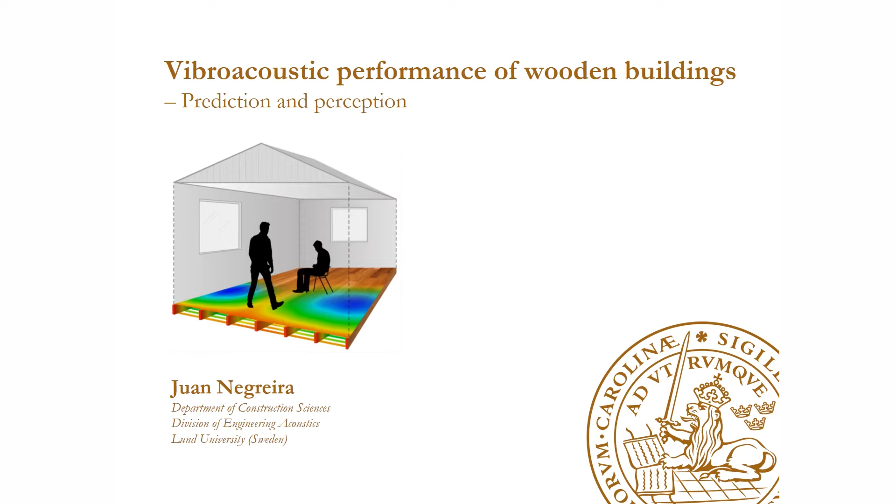I'm going to try to present it in a very descriptive and non-technical way. If someone has a question afterwards, I'm willing to happily go into the details.

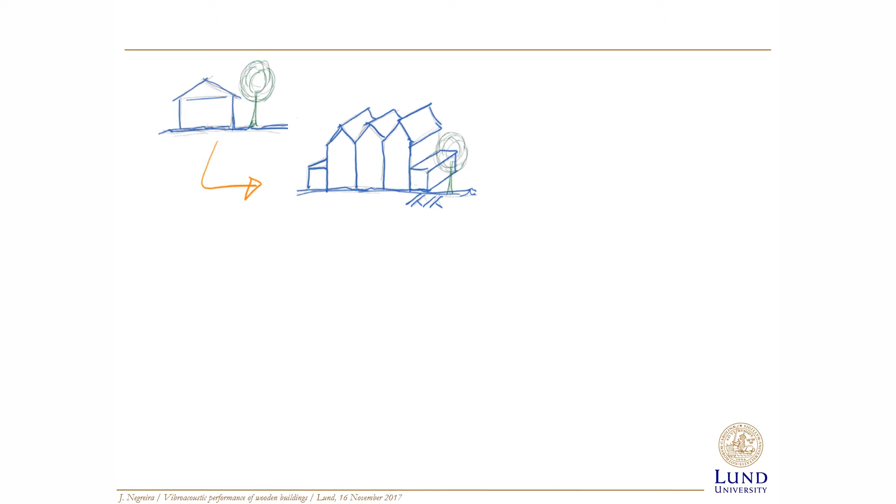This is a house which could be made of any material. This is how people used to live many years ago, isolated from each other, growing their own products, going out in the morning to hunt, coming back in the evening. But as society evolved, people started to gather together and create populations. That became even more important, even more patent, after the industrial revolution. Then cities started growing and people started living all together, building vertically, close to each other, as cities densified.

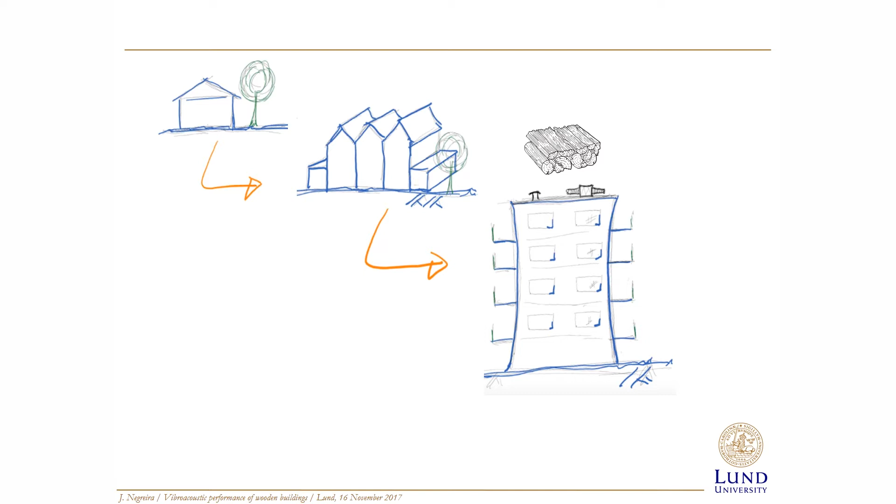Nowadays, especially in Sweden, those high-rise buildings—because Sweden is the third largest country in the European Union and 70% of it is forest—many of these buildings, and growing, are made of wood. The problem is that even though they comply with present acoustics regulations, as Nikos talked about before, people still complain.

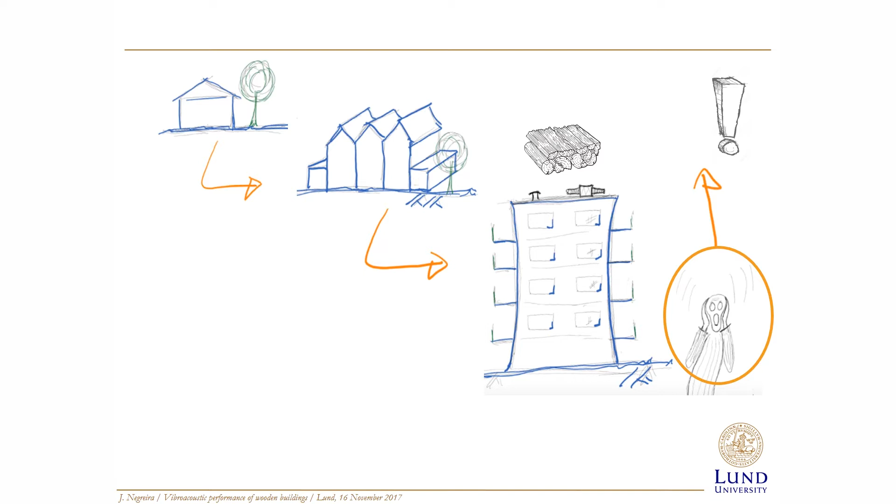They say, yeah, they may pass the regulations, but I'm not happy here. So one first objective of my thesis was to try to understand why people complain. So the first aim was to try to find design indicators of how humans perceive vibrations.

I focused quite much on the low frequency range. The other point of my dissertation was—you have to believe me on that—there is a big difference whether in one building we use one type of floor or another type of floor. Whereas this is quite easy to predict in heavy structures like concrete.

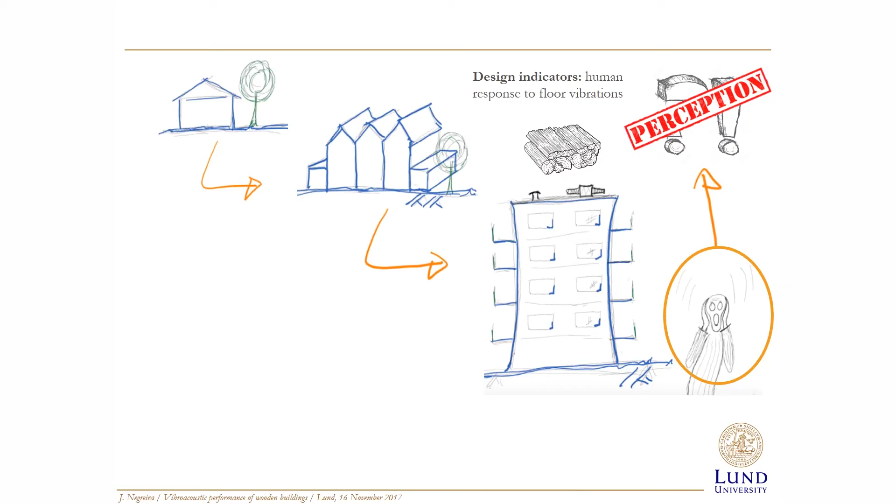Wood is a natural material. It's very unpredictable. It depends quite much on whether you have knots, resin pockets, and stuff like that. So due to that variability, it's quite hard to predict the behavior of a wooden structure.

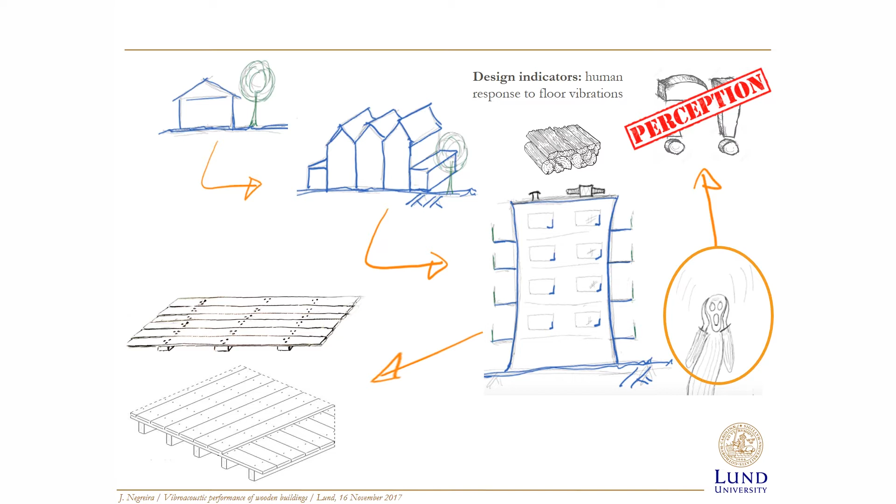So the second aim of the thesis was to try to create and develop computer models to predict the vibroacoustic behavior of these buildings during the design phase. If that could ultimately be achieved to some extent, there would be cost savings for the industry, and ultimately vibroacoustic comfort could be achieved by the inhabitants.

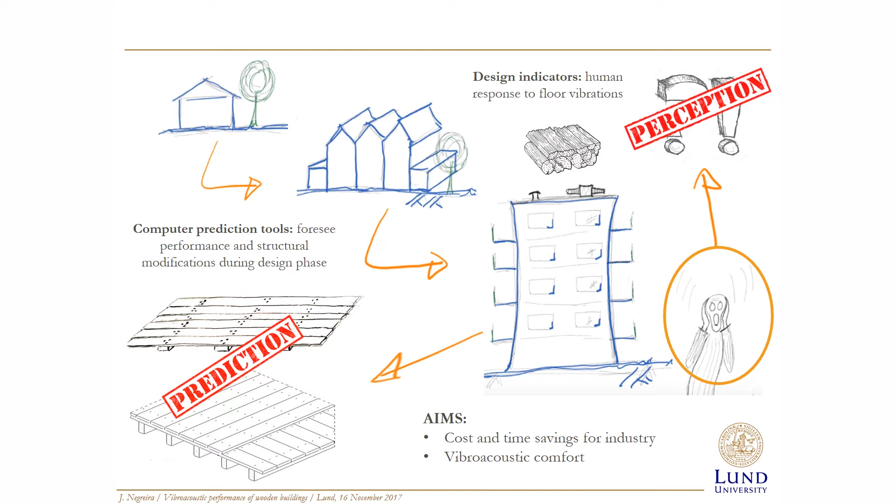So this is everything which was driven at during the 5 year PhD. I will just go a bit deeper into the details. The title was Vibroacoustic Performance of Wooden Buildings, Prediction and Perception.

Wooden multi-story buildings in Sweden were allowed during many years, but due to numerous urban fires during the 1800s, they were prohibited, and that century-old ban was lifted in 1994. All of a sudden, those buildings started gaining popularity and increased market share, just because wood is very cheap and very abundant in Sweden.

It allows a high degree of prefabrication. That means you can build indoors in a factory, transport it to the building site, and just put it up like a puzzle to make a building, which is very important in a country with bad weather like Sweden. It's also environmentally friendly, so it has a lot of advantages.

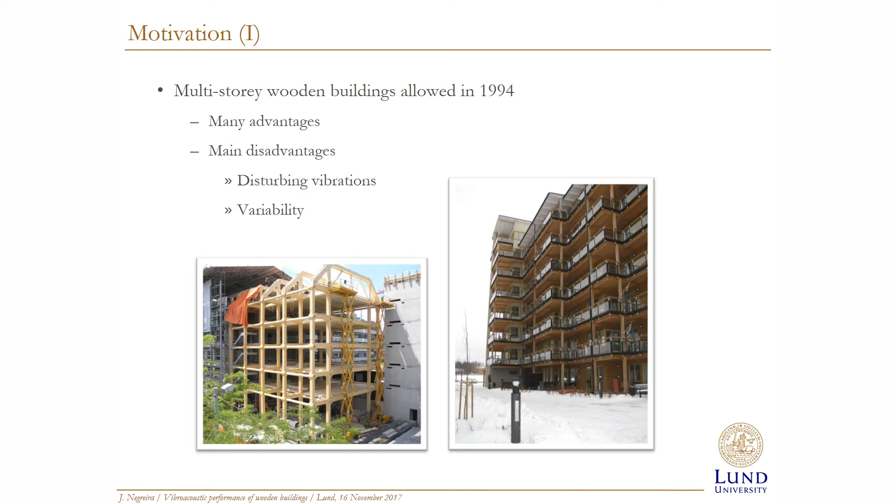But as I said, we have two big problems in our field, the field that I'm dealing with: the variability, and due to that, the acoustic comfort.

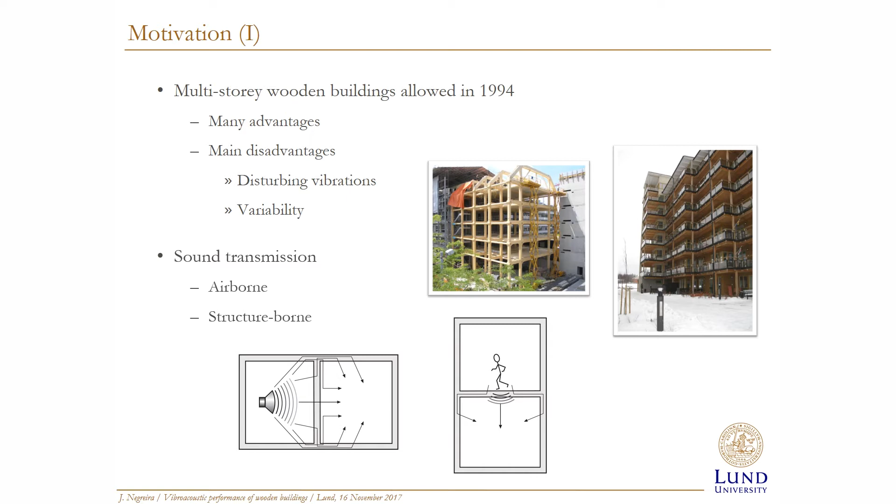We can distinguish in any building, but now focused on wooden buildings, two types of sound transmission. One is called airborne sound, where most of the sound energy is transmitted through air—I speak, it goes and my voice hits a wall and radiates to the other room. That is airborne sound. The other is impact sound transmission, which is the sound we hear down here when someone above us strikes directly on the floor. It can be people walking, objects dropping, any source you want.

Nowadays, the current ISO standards—and now I'm going to focus on impact sound because it's the one which has more importance, or is more critical, in wooden buildings—the current ISO standards in Sweden... and Sweden is the only country in the world which accounts for frequencies below 100 Hertz.

The only country in the world that counts frequencies from 50 hertz to 3,150 hertz in impact.

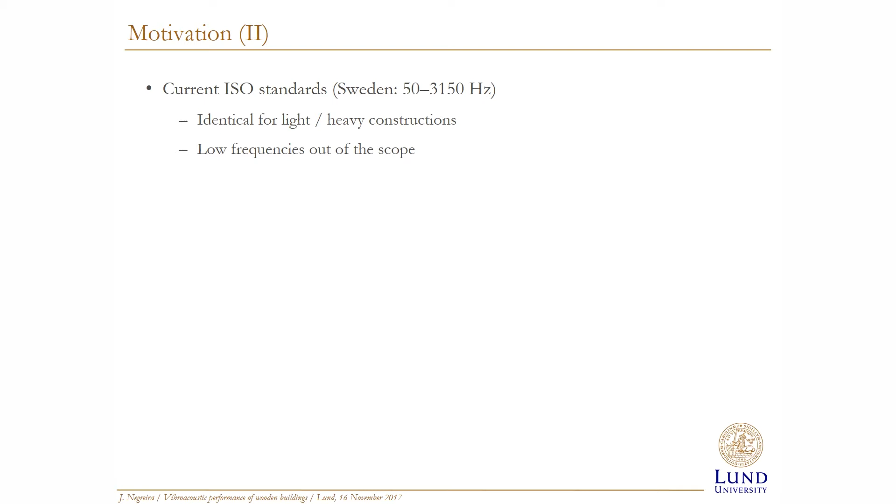The problem with those ISO standards is that they are identical for concrete heavy buildings and lightweight buildings. When they were developed, they were just made for concrete buildings, because wooden buildings were prohibited. So when wooden buildings were reintroduced, they said we'll just use the same norms.

The problem is that low frequencies are out of the scope, frequencies below 50 hertz. That means they're not accounted for, and that could trigger some types of problems.

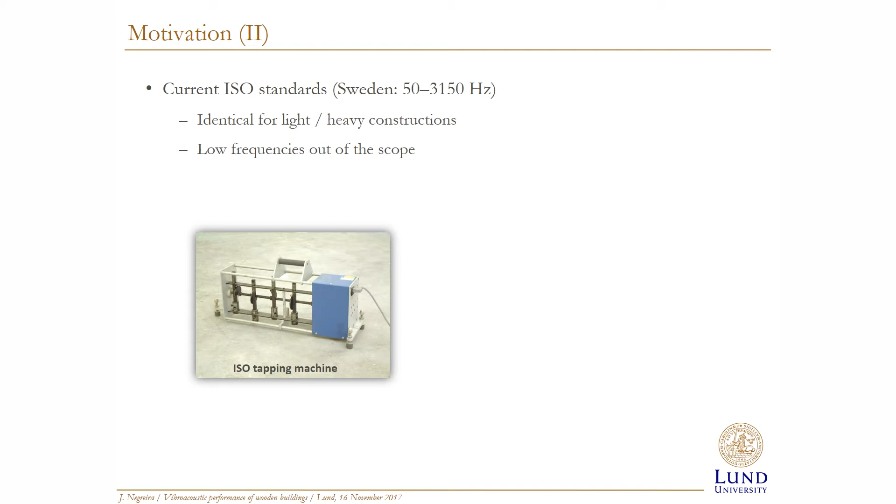As a matter of fact, there's an excitation source called the tapping machine, which is like 5 hammers that alternatively hit the floor, and then you measure the sound down in the room below. So using this source, you can assess how good your floors are against impact.

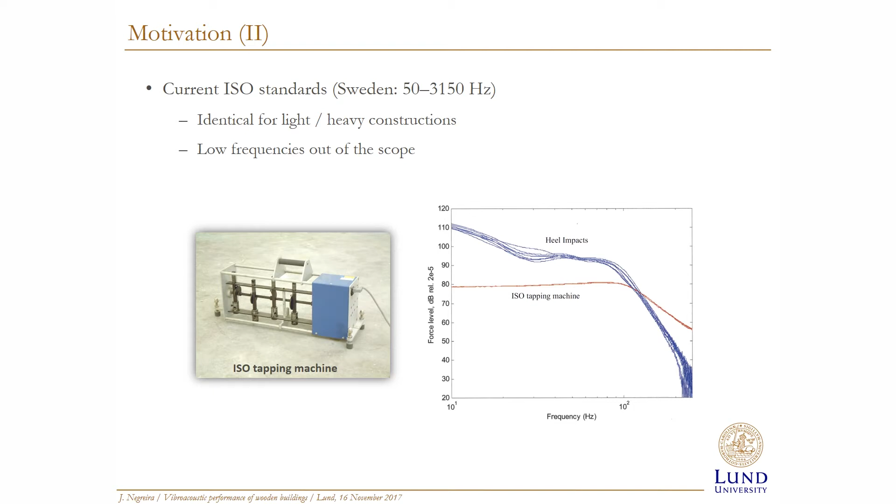If you compare the force that these tapping machines create against daily activities, this is a plot from a Norwegian researcher called Anders Homb. You can see that the force from the tapping machine very much underestimates heel impacts, which are daily activities that happen in wooden buildings, meaning that at frequencies below 100 hertz, daily activities are actually much higher than what you could evaluate or predict with this tapping machine.

Based on that plot and other things, there was this Swedish research project I was involved in called AkuLite, where we measured impact sound from 50 hertz to 3,150 hertz in wooden buildings, and then asked people via questionnaires how they felt about living conditions and stuff like that.

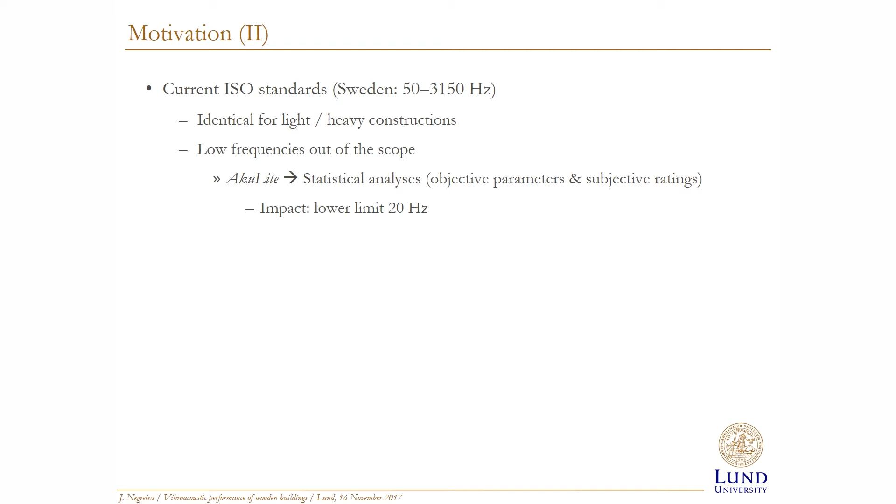If we compare those standardized impact sound indicators, which go above 50 hertz, with people's responses to questionnaires, the correlation was around 52%, the R-square correlation statistically. Whereas if you include frequencies down to 20 hertz, the correlation skyrocketed up to 83 or something.

That points out that in wooden buildings, since they are very light and easy to put into movement, low frequencies are of importance.

Then another question is, how do you address those frequencies below 50 hertz? Are those vibrations? Are those sound that you can measure with a microphone? That's another question.

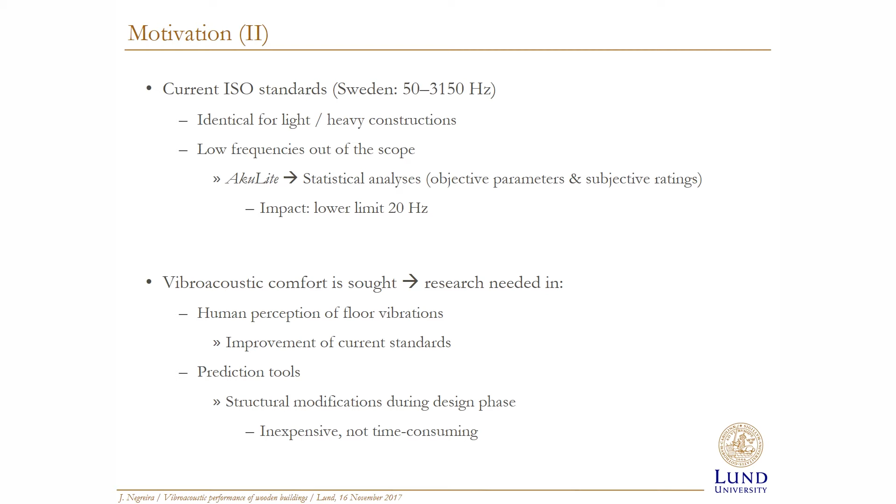The whole point was that if vibroacoustic comfort is to be achieved in these types of buildings, focusing very much on the low frequency range, we have to dig more into human perception of vibrations, and also try to improve the correlation with the standards, and develop prediction tools so you can predict the behavior of a building before it's actually erected, saving time and money for the industry.

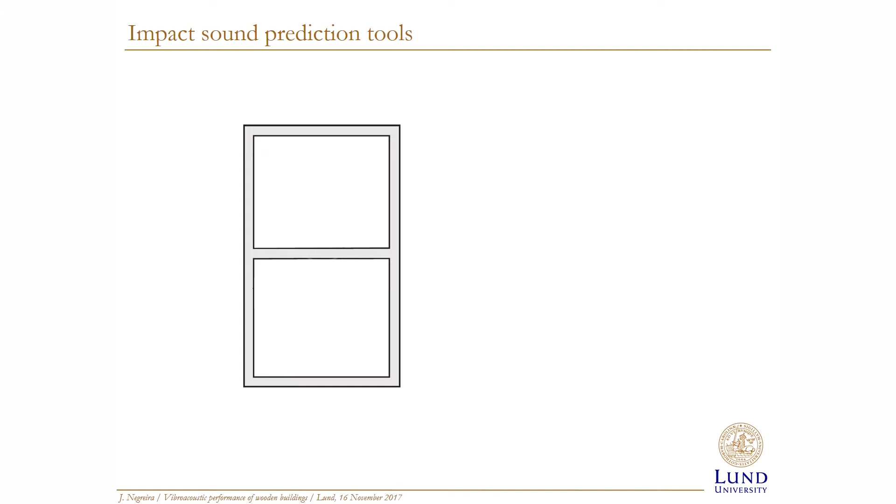So as you can see, if you are to develop a prediction tool to see how people perceive sound, you have to work on 3 aspects. One is the excitation sources.

If we are to create computer models that want to predict the actual impact noise, how do we model those sources in the computer? We have to model them in an accurate way.

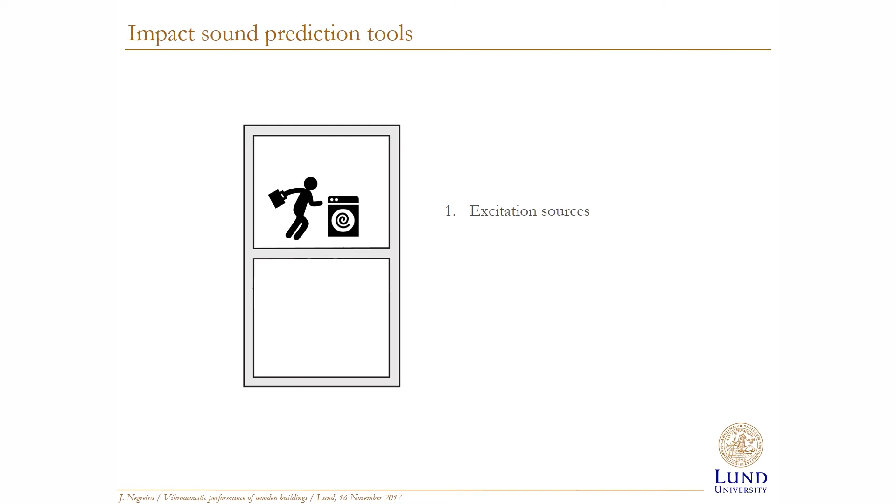Second of all, how do we model the floors? Wood, as I said, is a very orthotropic, variable material, which has to be thought through very carefully, because it's not that straightforward, it's not homogeneous. So one has to dig into how to model the actual floor construction.

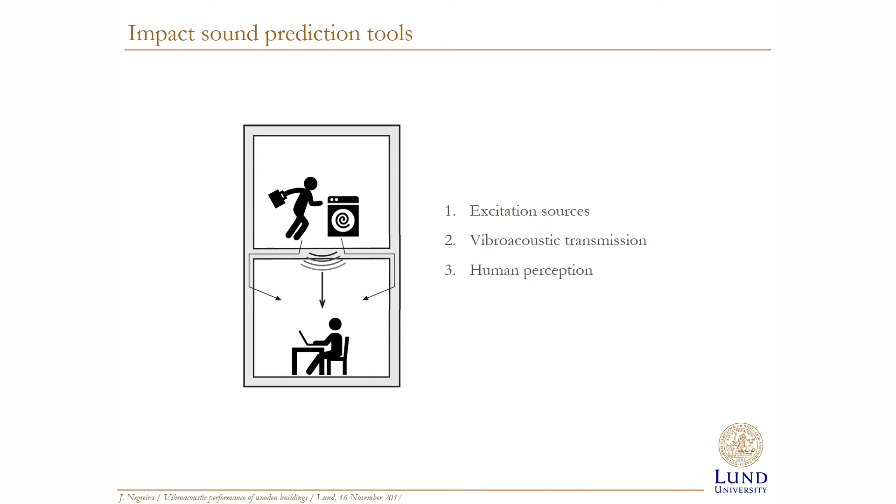Third of all, once that sound travels from the excitation source to the room below, how do people perceive that? This is a graphical summary of what I did during my PhD dissertation, which I'll be coming back to.

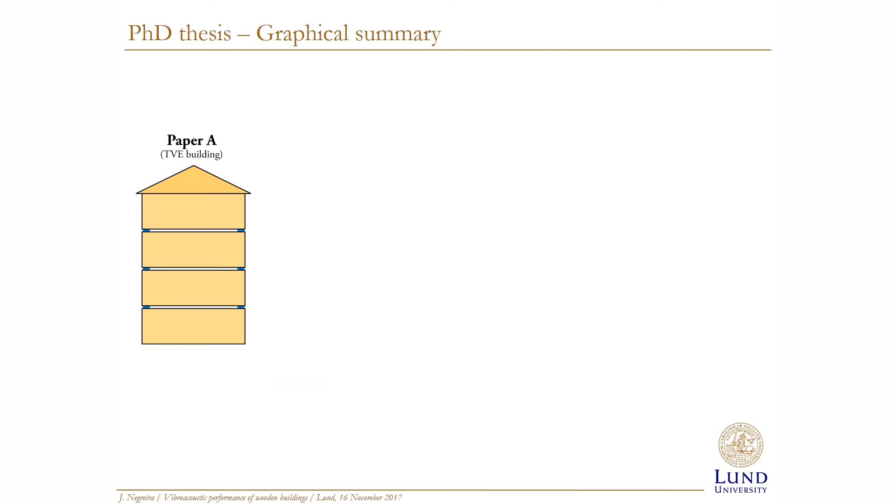During the whole presentation, we tried to start at the big picture: I'm going to model a building. The first conclusion was, you cannot do that - this is too complicated a thing. So take a step back and look into different details before you try to put up a whole building.

So in one of the papers, what we looked into was some kinds of elastomers. In the first paper, paper B, what we looked into - normally you have a wooden floor made of a flat surface, and then you have beams and stuff like that.

The calculation time of those floors, when I put some kind of excitation in them, will depend very much on what you model. So the first thing was, okay, in order to be accurate but not spend too much time, how much level of detail do we have to consider? Do we need to model the air in the cavities between beams and plates? So that was one thing we looked at.

The second thing was, okay, there are a lot of modern constructions, types of buildings that use rubber materials between floors and walls in order to reduce vibration transmission, flanking transmission. This is a quite complex material, so how do we model that?

The third step was to take a junction, which is where a lot of difficulties happen, when beams meet on top of a plate, or two plates meet on top of a beam. How do we address these types of junctions, and how do we address it in a simplified way?

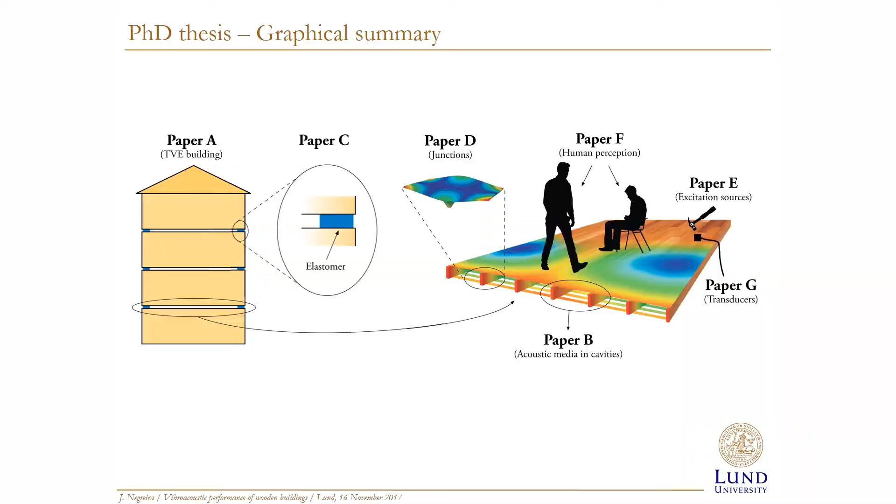The next one was how to model the excitation sources. And the last one was the transducers — how do we measure? I won't talk about this, but most of the measurements we did during the thesis were done by accelerometers that we developed and calibrated in-house ourselves.

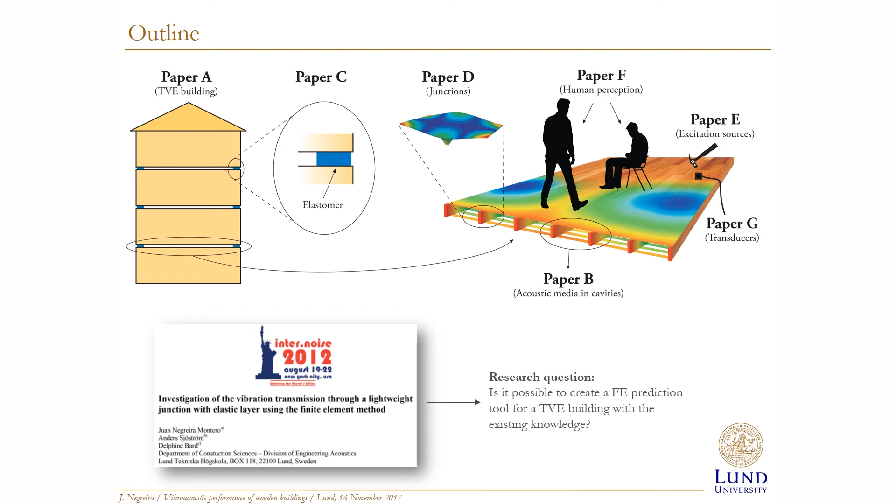So I'm going to go a bit more into detail now, one slide for each paper. But the first paper, as I said, the research question was: is it possible to create a prediction tool, a finite element prediction tool, for this type of building with existing knowledge? As I mentioned before, the answer was no, it's not possible.

What we have here is a building made of boxes stacked on top of each other. I didn't believe it the first time they told me these timber volume elements are boxes stuck on top of each other. I said, yeah sure, but they are. We went up to the factory, and they are boxes which have all appliances and furniture inside. You just come to the building site, stack them on top of each other, and put some type of elastomers in the middle in order to reduce flanking transmission.

Compared to traditional buildings, where if you apply a force on the upper floor it goes directly through the partition and also through the walls, in these types of buildings you force the vibrations and sound to go through the flanks, and hopefully you reduce it with those elastomers there.

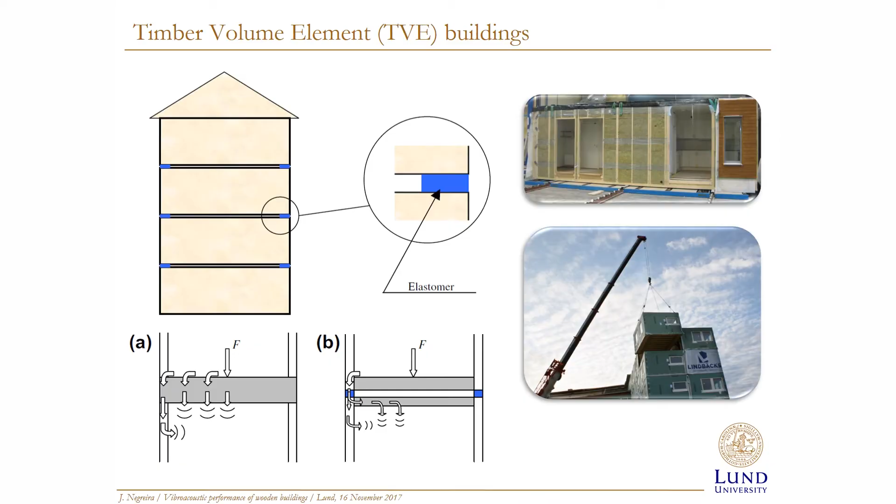What we tried to do was compare this TVE building with a normal building — here is just an extract of some results. We put a model, two boxes, here's a cutout of that model, put a force here, and measured both vibrations going up on this wall and going down.

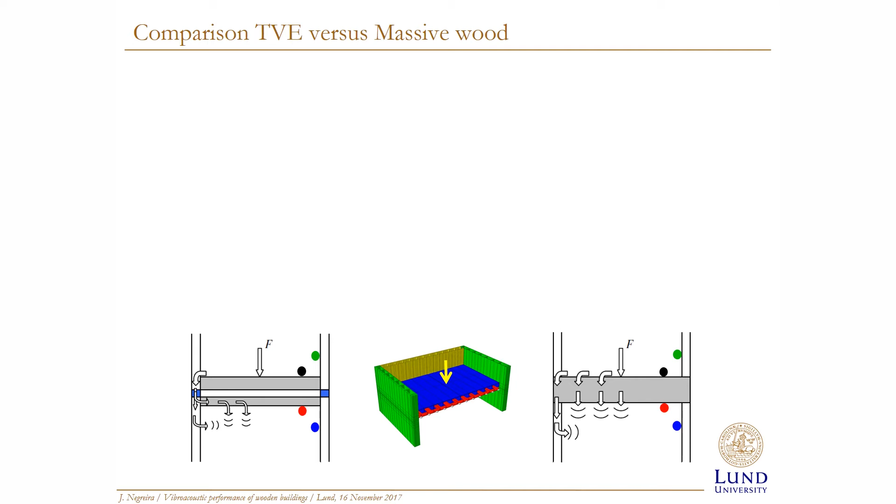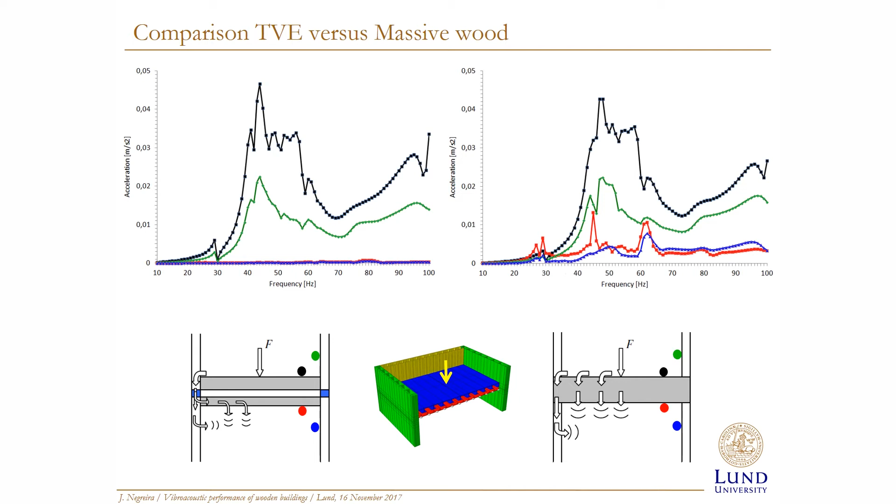If you look at the red and blue lines, you can see on the left that these lines lie totally at the zero level. That means we have total reduction of vibrations, but we know from measurements we performed that this is not the case. So the main conclusion was that this is an unrealistic behavior.

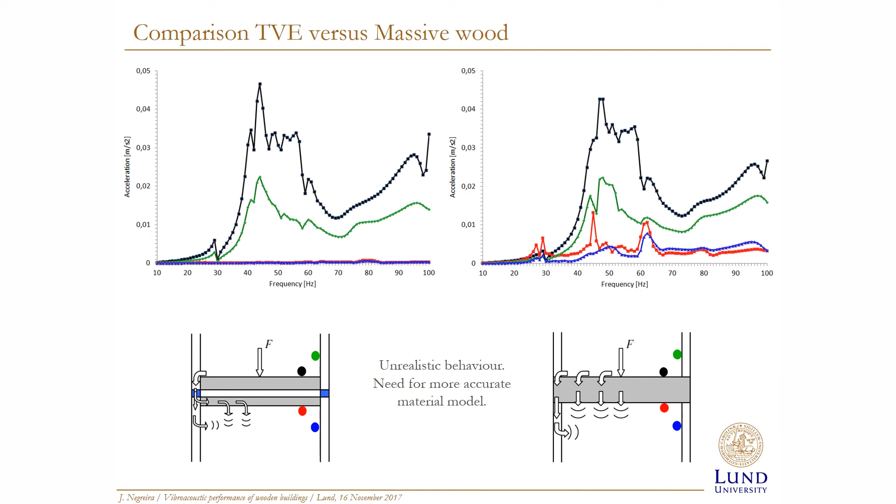We need to take a step back, as we said, and look a bit more into the details. That's what we tried to do. The second step was to try to look at the acoustic medium cavities.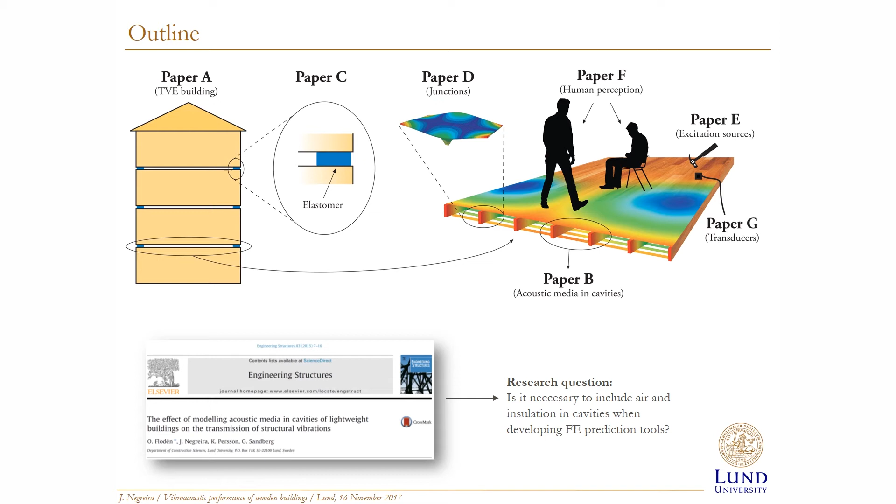Is it necessary to include air and insulation in the cavities when developing these prediction tools?

The fact of simplifying the models or not can actually gain you a lot of calculation time. We are talking that maybe some models like this would take one week to calculate. That's why it's important, if this will eventually be used by the industry, time is money, to come up with as many simplifications as possible while still keeping the accuracy so they can actually rely on it.

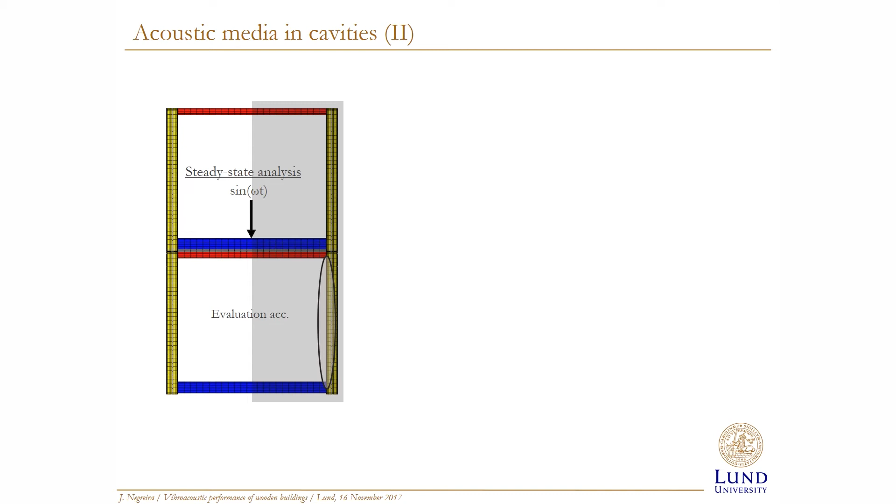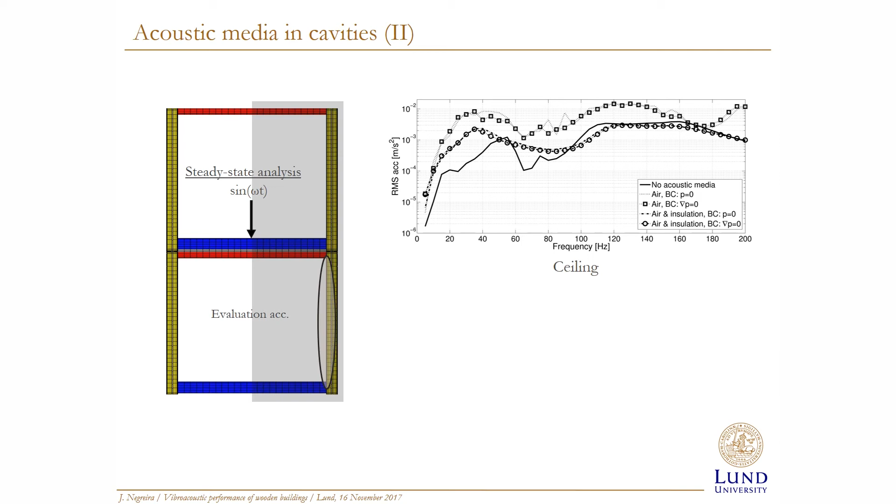What we see here is a scheme of a model, a module on top of each other. We apply a force here, and then we measure or evaluate it in the room below. We tried a lot of different models for how to model the insulation, how to model the air, a lot of different things. This is just one example of a result, and the main conclusion was that yes, you actually have to consider air and insulation when creating and developing finite element models.

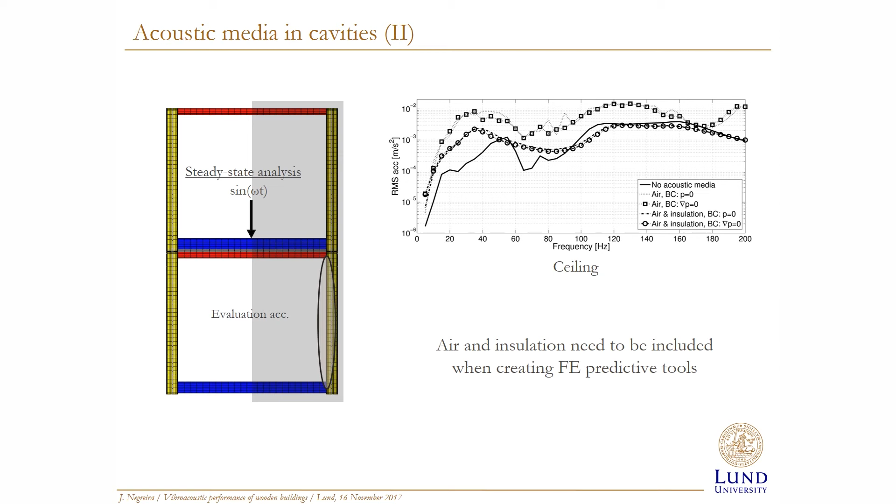So that was not good, because you will have to spend a lot of extra time with the modeling and a lot of extra time in the calculations.

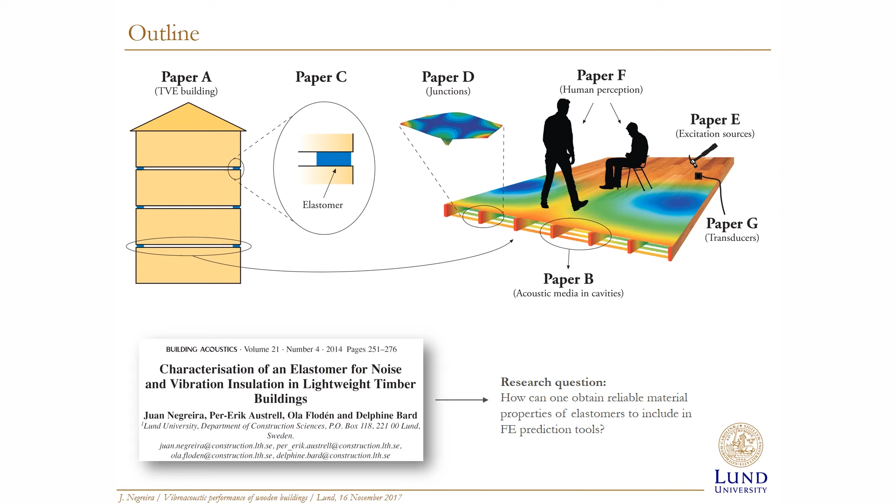The third thing that we looked at was how to actually obtain reliable material properties of elastomers when we put them into those models, because if we are to model real buildings, we will have to model elastomers. So normally when you buy an elastomer, we focus here on one you can see how they can be used. This is just a support that we did in the lab with elastomer, which you can just put between two pieces of wood.

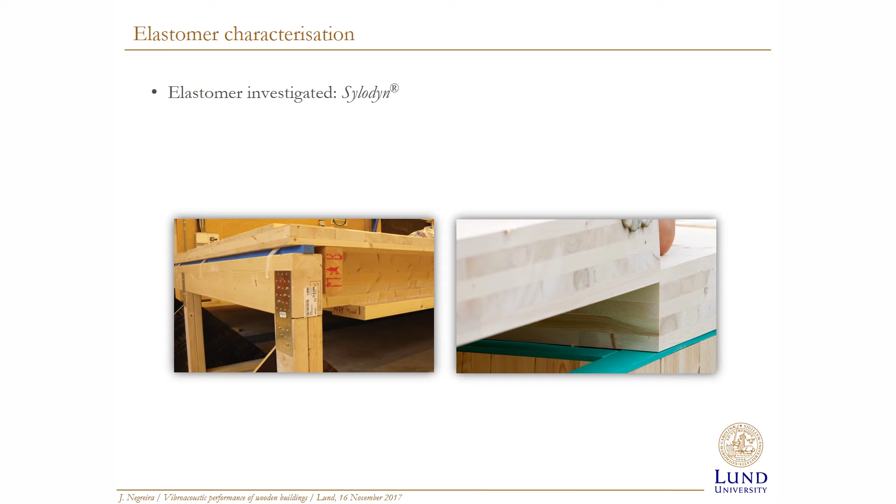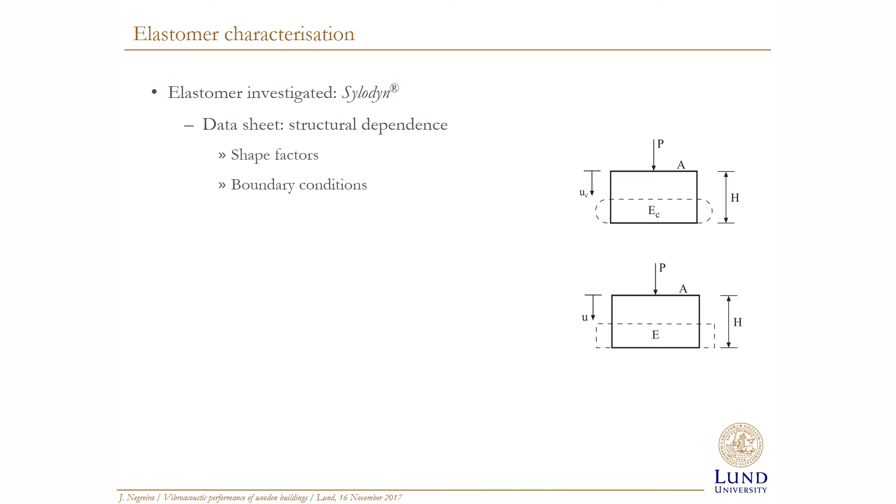So normally when you buy one of those, what you get is a kind of catalog, a data sheet of the product, and the properties you get there are very much dependent on the conditions the tests were performed under. What you want is not material parameters that are test dependent. You want material parameters where you can actually model different and arbitrary sizes.

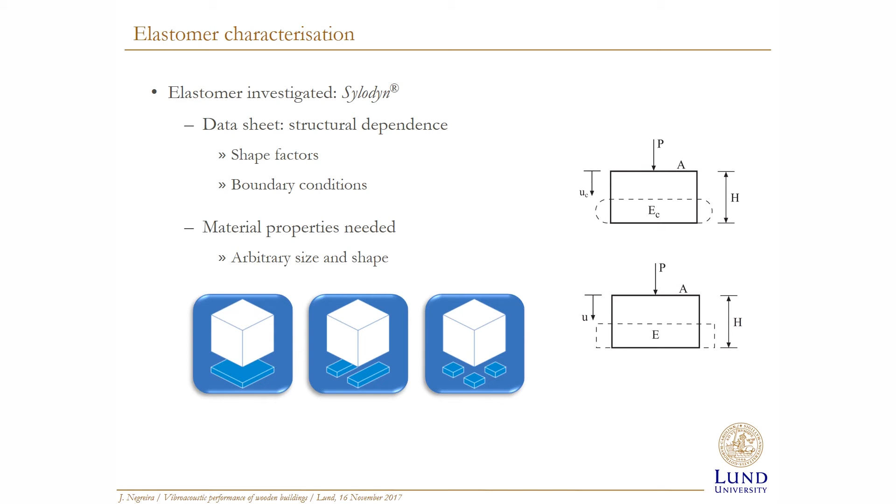So what we did was try to develop a characterization method where you have properties that have nothing to do with the data sheet with the ones you actually want, because sometimes if you want to predict how a building will perform, you might say, okay, I'm going to try to use a strip, or I'm going to try to use blocks instead. In order to do that, you need material parameters which you don't get from the data sheet. So what we did here was develop something that gets the material properties we want from that test data.

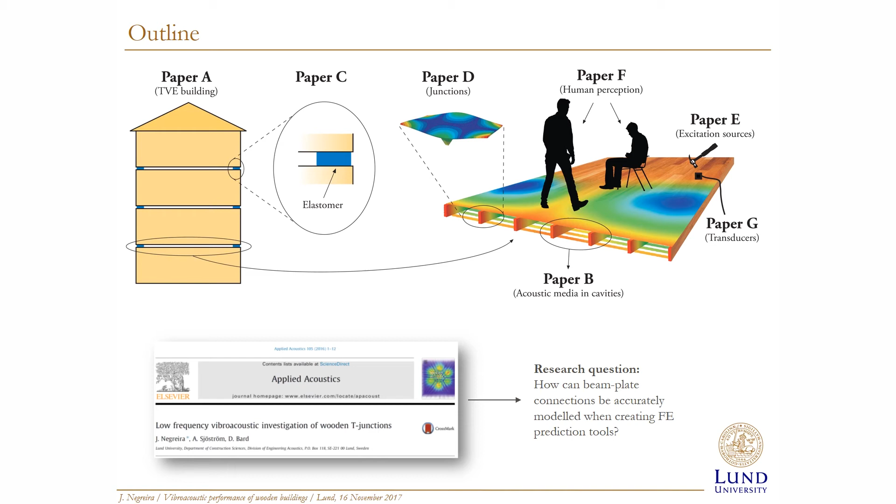Moving on a bit, the next thing we looked into: now we know we have to put air in the cavities, we know we have to put elastomers between floor and walls. The next is these beam-plate connections. How do we model them?

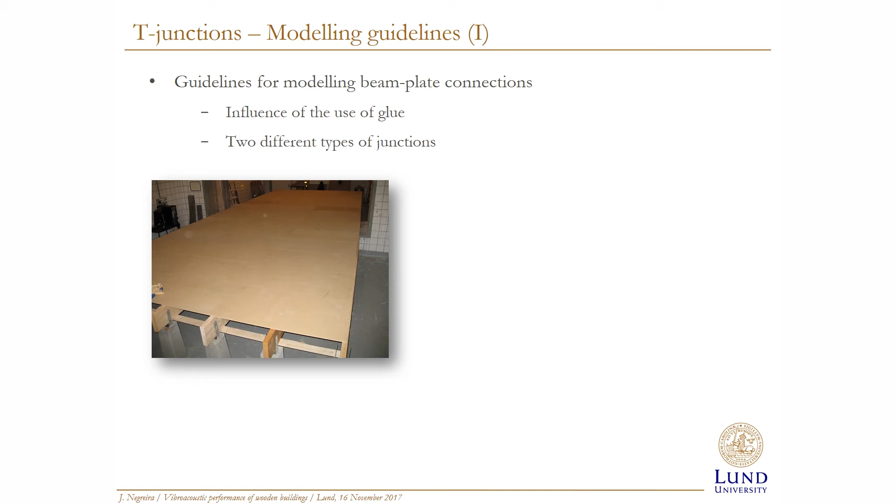If you look at a floor like this, this is a lab test that we did. It's basically beams with a secondary spaced boarding and plates on top of it. You don't see it, but you have to believe me, there are two types of junctions in that floor: two plates meeting on top of a beam, and one plate going over a beam.

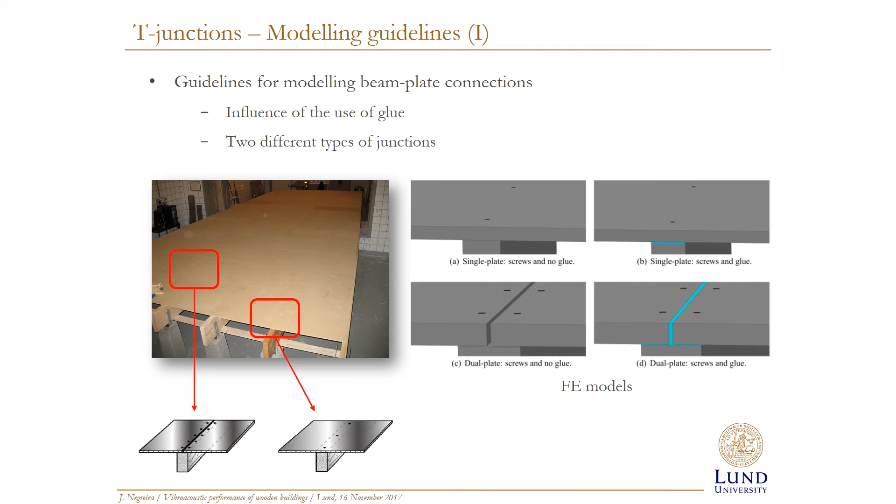So what we did was create models in the computer with different configurations of just these junctions, with or without glue, because normally in this type of floor you have to use screws and glue. So if we can actually avoid modeling the screws, or if we can avoid modeling the glue, it'll be a big time and cost savings, as I said before.

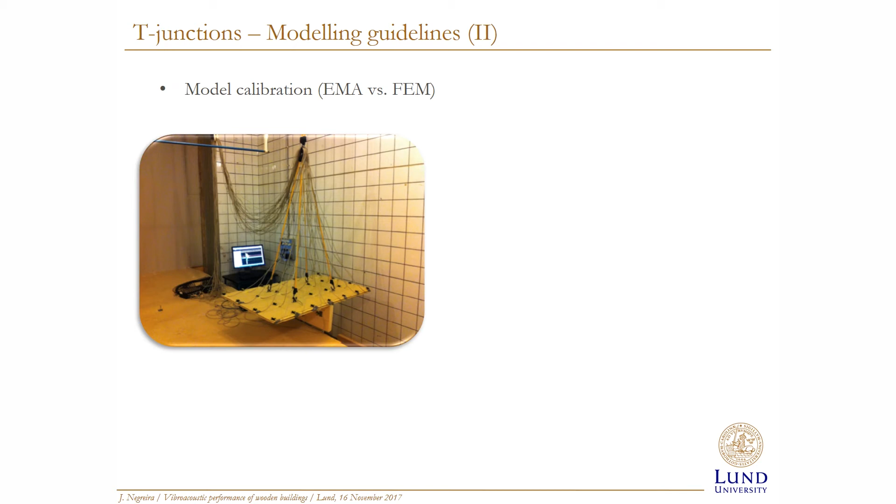So what we did was create some cutoffs of a real floor. We put a lot of accelerometers there, and then we did measurements. After those measurements were performed, we modeled that T-junction in the computer, and once that junction was validated, we played around with it.

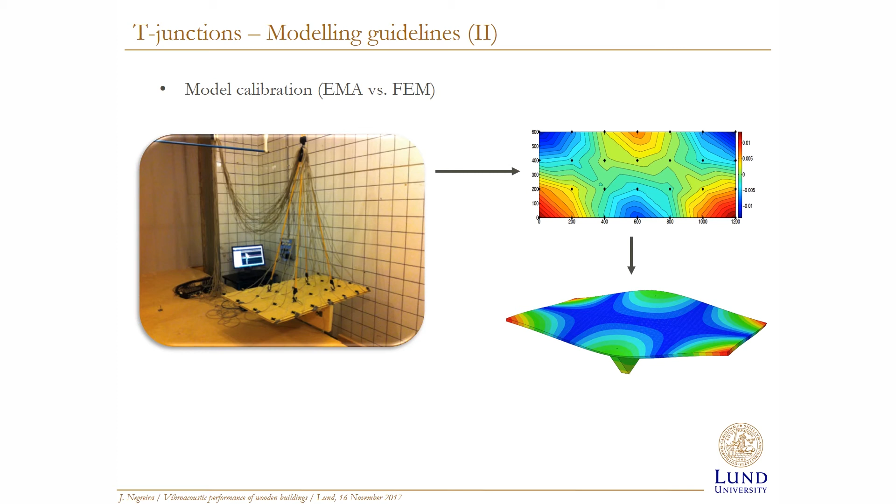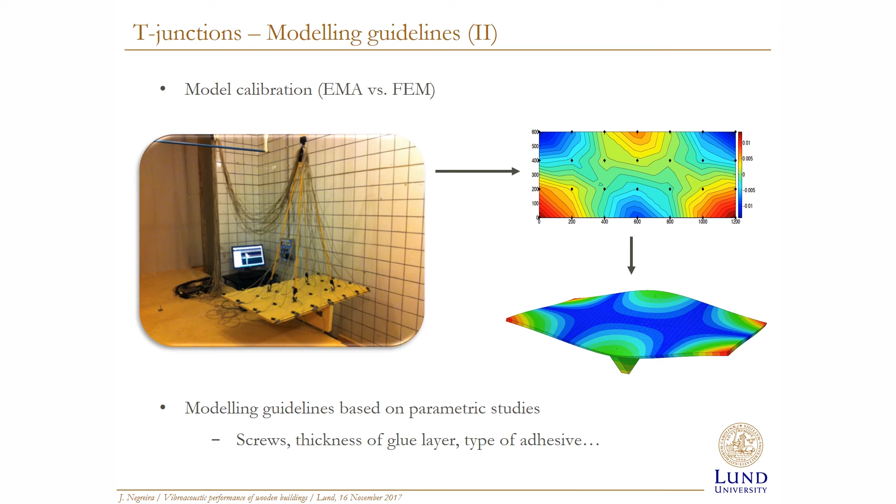We modeled the glue, put the glue in, and studied differences between the model results. Since my first model was validated, we said, okay, but the differences here, the relative difference, will also apply if I play with the models instead. So the result of that study was to create guidelines based on parametric studies on the screws, on the thickness of the glue layer, on the type of adhesive one should model, whether one has to consider it or not, and stuff like that.

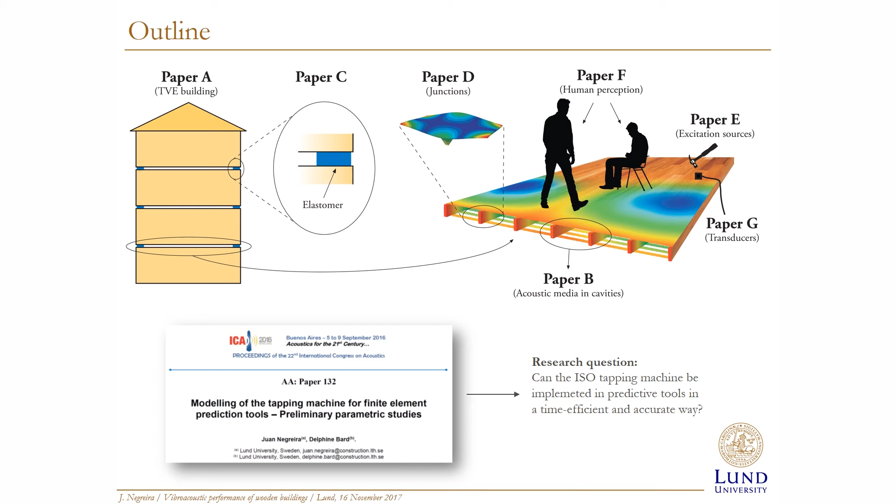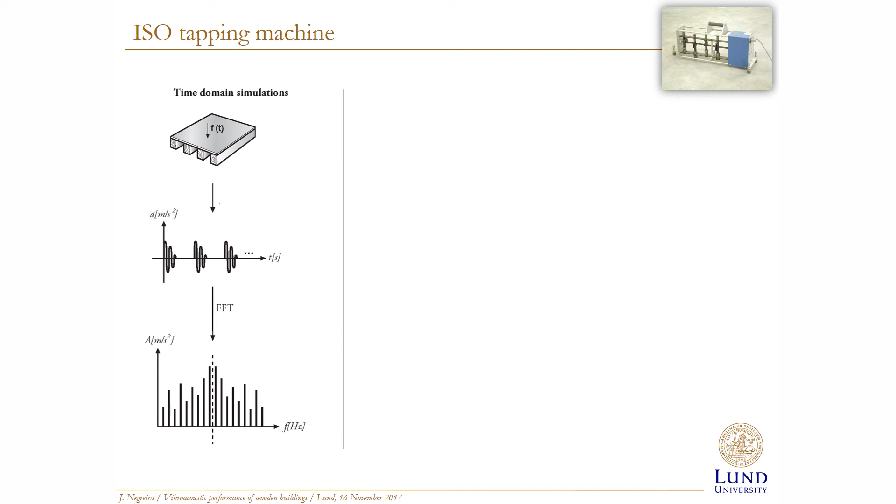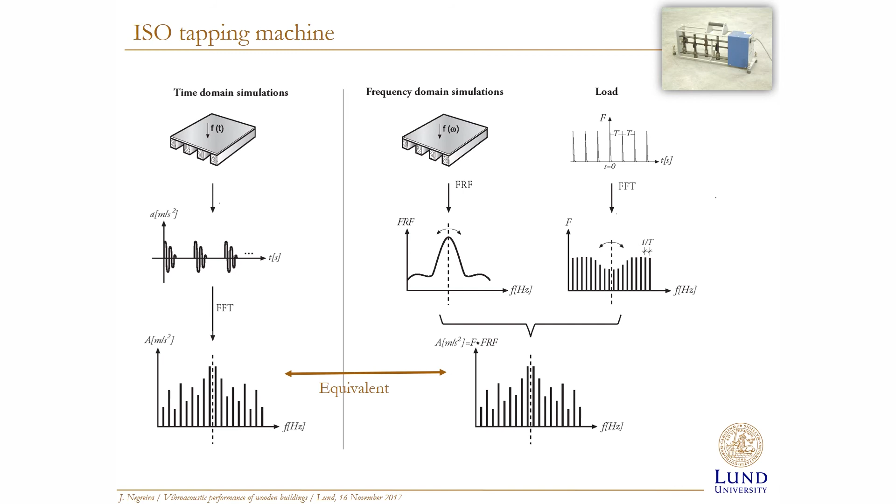One other thing I mentioned in the beginning is the excitation source, which is something you have to look at. What we did here was implement the tapping machine, a standardized source in the models. I won't go into detail, but we tried to save time. Normally, time domain simulations take a lot of time, but we proved that by doing it in the frequency domain with some different scaling, you get the same results. So basically we tried, in the same way as before, to cut down on details to gain time. Here it was more or less the same, trying to model this source while lowering the calculation time.

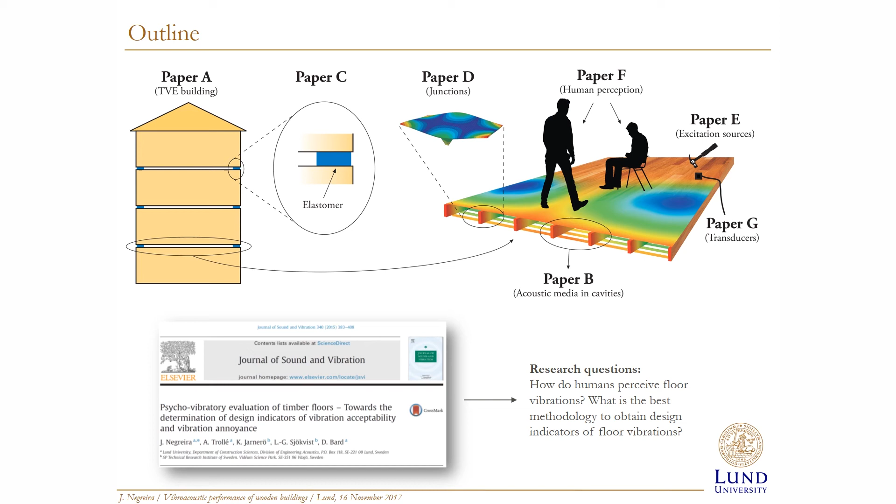Finally, we focused on how people perceive vibration, so we call it a psychovibratory test. We put 5 floors in the laboratory, real floors delivered by manufacturers, and did 2 different tests, a seated test and a walking test. In the first walking test, we had about 60 people participating across the 5 floors.

In the first test, we told people to walk back and forth between two lines, measuring the accelerations they created with accelerometers placed at marked crosses. After they walked back and forth, we gave them a questionnaire asking how they felt about the vibrations and the noise they created, very much along the lines that Nico presented in his study, but applied more to vibrations.

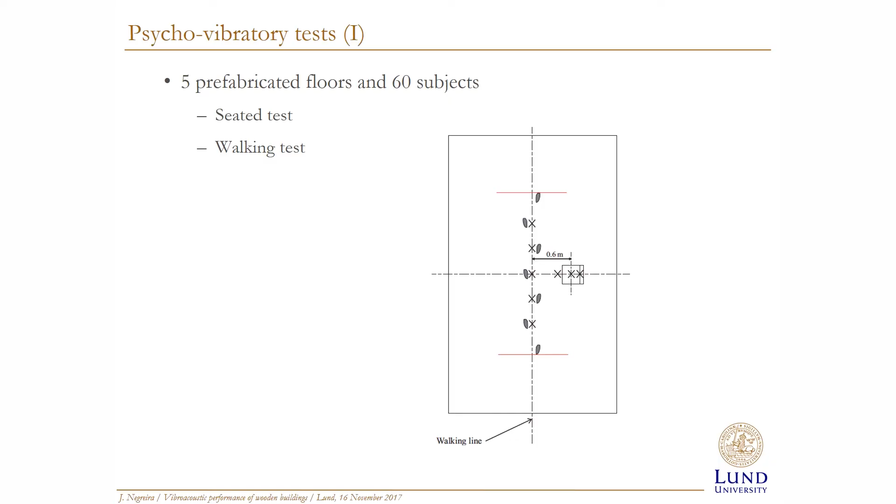The second sub-test was a seated test. The test person was seated on a chair, where we measured the vibrations they were exposed to at 3 spots: the backrest, under the chair, and between the feet. Then I or another colleague walked back and forth, and we sent another questionnaire asking how they felt about the vibrations created for them while seated. So here you have two pictures, one of me performing the seated test while my colleague Anders was walking back and forth, and one of me ready to walk between the two lines.

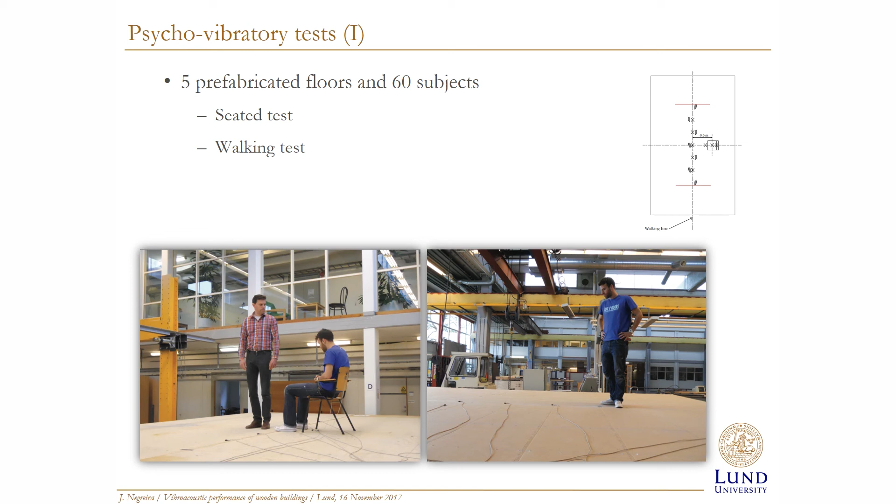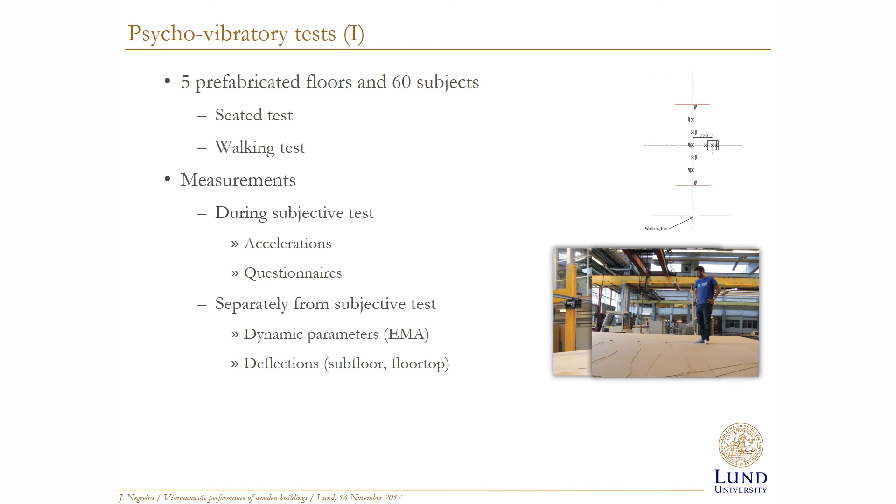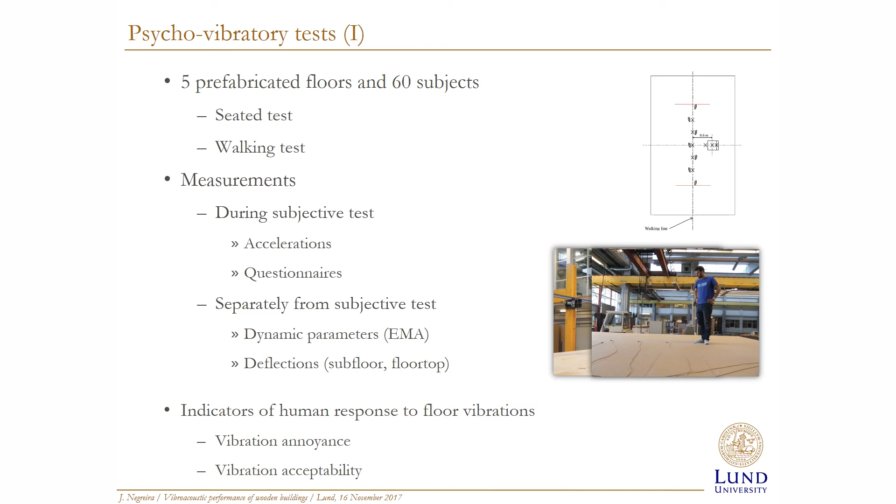During the subjective test, we measured the accelerations people were creating or exposed to, and sent out questionnaires to them. Apart from that, we also measured objective parameters of the floors, dynamic properties like eigenfrequencies, eigenmodes, damping ratios, and so on. By doing statistical analysis and massaging all the data, we came out with some design indicators for floor vibrations. If you follow this, people will not be annoyed and it will be accepted from a vibration point of view; if you go over that, it will not. So these are some kind of indicators. I should point out this is not something written in stone, it was just 5 floors, but at least it showed trends to follow.

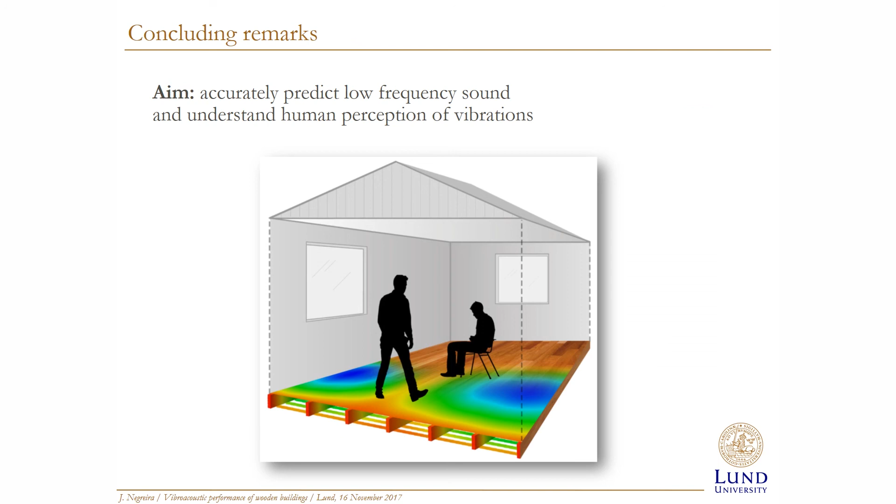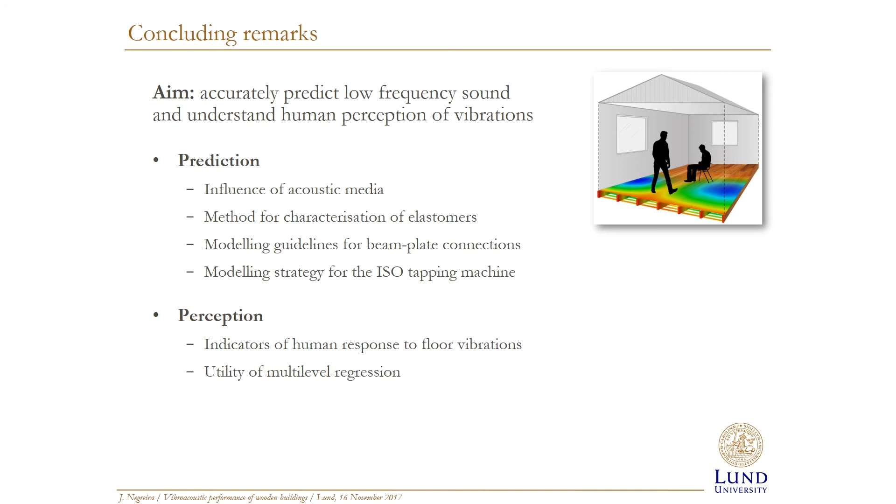To conclude, the aim of the PhD project was to predict low frequency sound and understand how humans perceive vibrations. We did research on the prediction side by looking into elastomers, air cavities, connections, and excitation sources. We also put effort into perception, coming up with design indicators for vibration annoyance and vibration acceptability. Finally, there were some measurement techniques, sensors and transducers that we developed, which I didn't talk about here.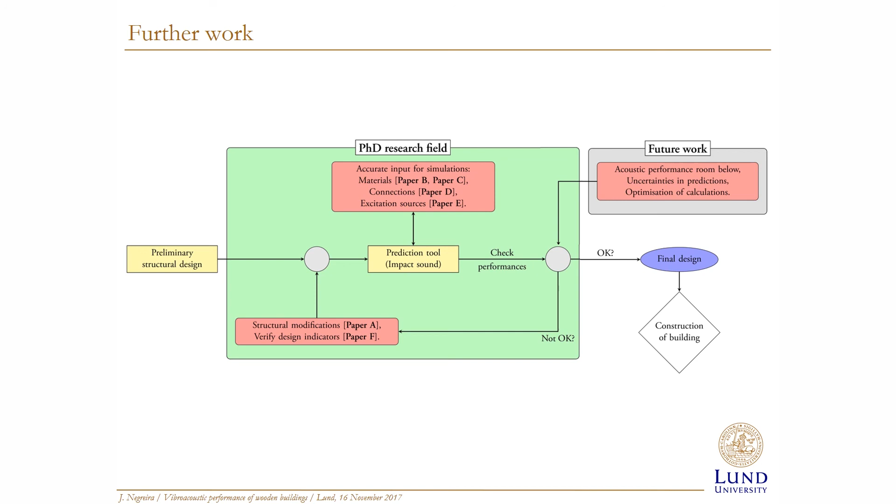This green box summarizes a bit what we did in the research fields. So, that's what we did, but we're still working now on how to assess uncertainties a bit more, and how to optimize calculations to reduce time, doing model reductions and stuff like that. Once that is up and running, probably you can just predict the behavior of a building, and people will be happy. So thank you very much for your attention.